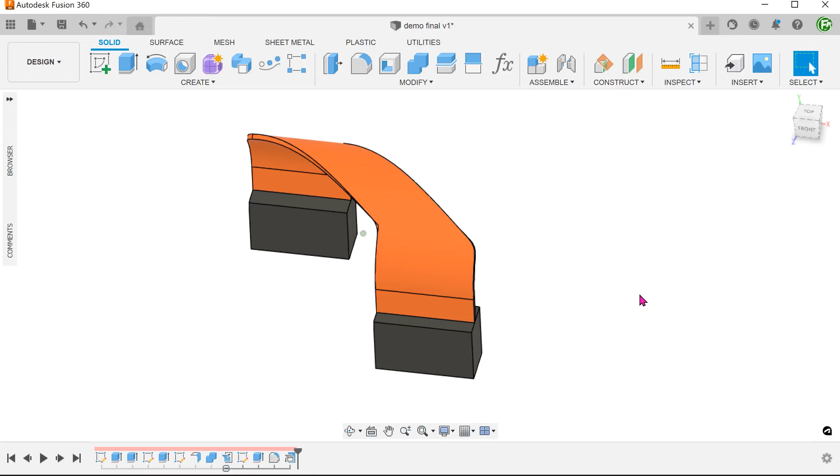In the course of my work, I often need to design flexible printed circuits. The challenge here is often to find the correct length to stretch across components, and at the end of the day, provide a flat profile for the electrical engineer to lay out the circuit. We can make use of the sheet metal functions to do this.

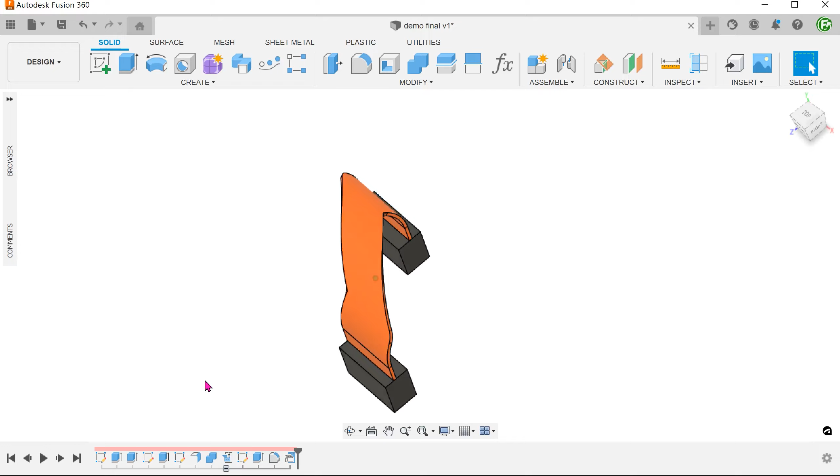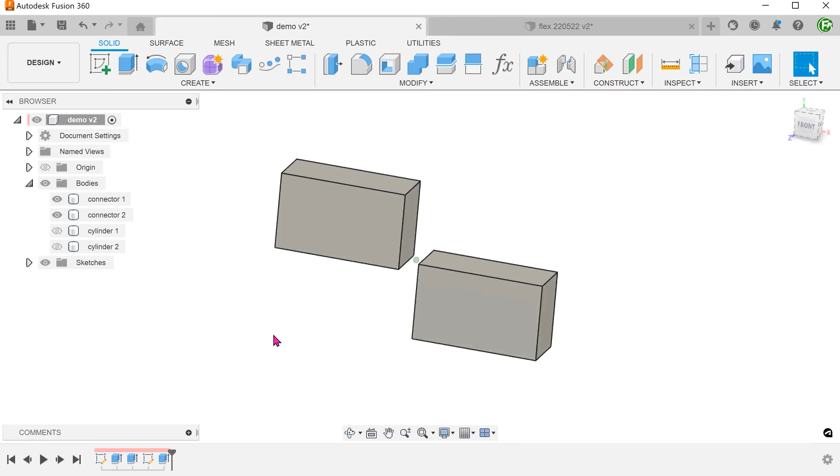The key here is to first model out the shape of the flex in its bent shape. I have two simple blocks here that represent electrical connectors. I need the flex to go from one block to the next. To add to the challenge, the blocks do not line up. I also have obstacles in the form of these two cylinders, which I need to avoid.

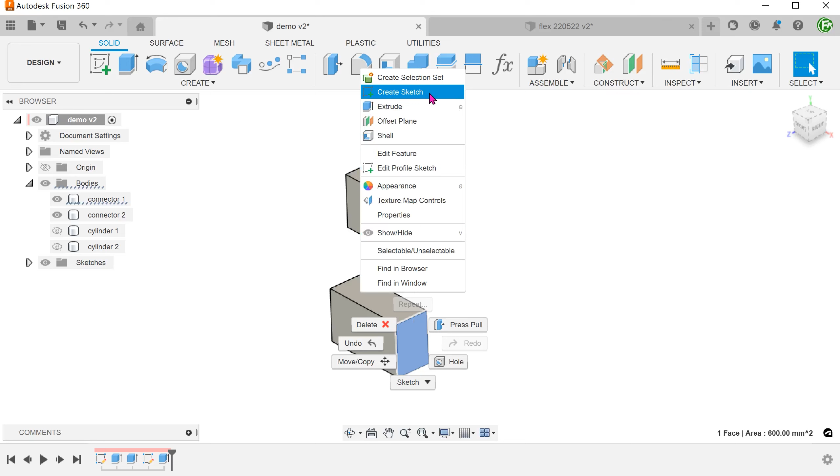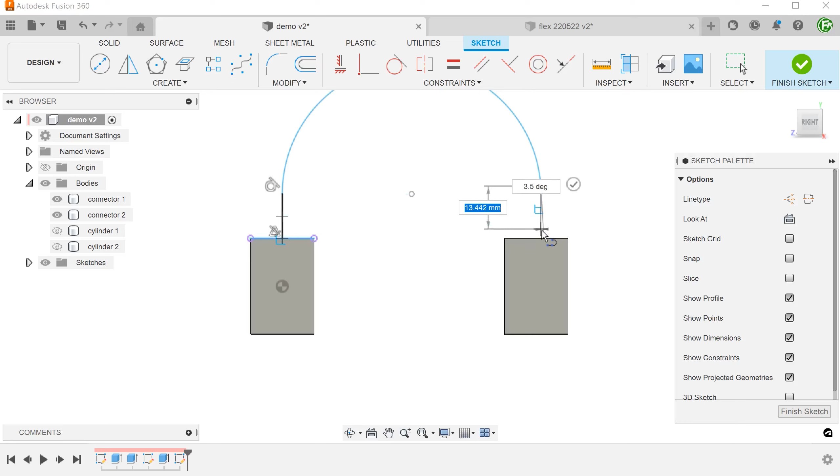Let's hide the cylinders for the moment. First, we need to draw the side profile of the flex. Begin a sketch on this face. Draw a vertical line from the center of this edge and drag out a tangent arc. Wherever possible, we want to include a straight segment, as this would facilitate the folding and unfolding process. End with another vertical line on the next block.

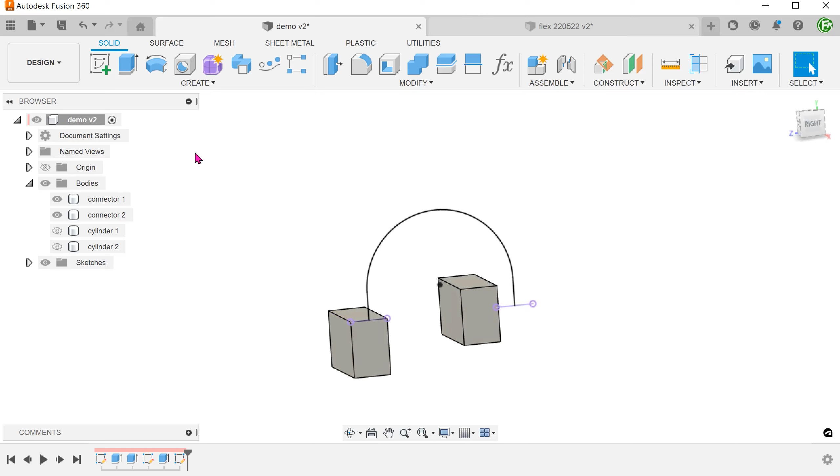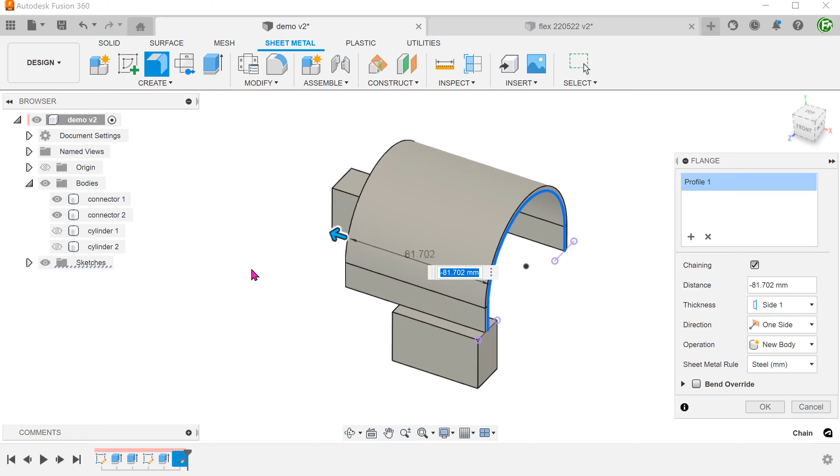Activate the Sheet Metal tab. Go to Create Flange, and extrude this chain of sketch lines into a flange. I will be using the default sheet metal thickness here. We want a flange to terminate on this face of the next block, so let's click on this face.

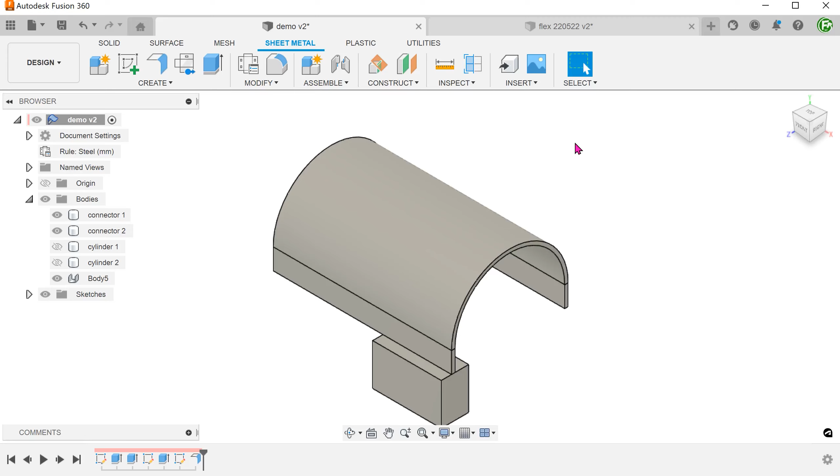Let's bring back the cylinders. The cylinders obviously interfere with the flex at this moment in time. Let's use these cylinders to cut into the flex.

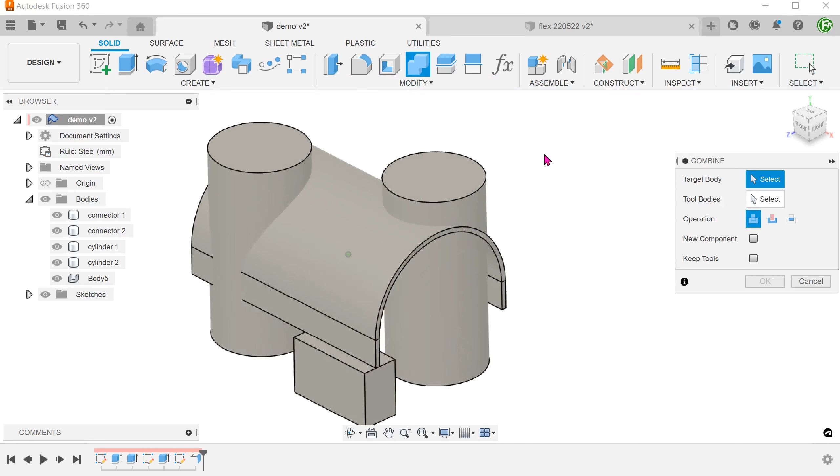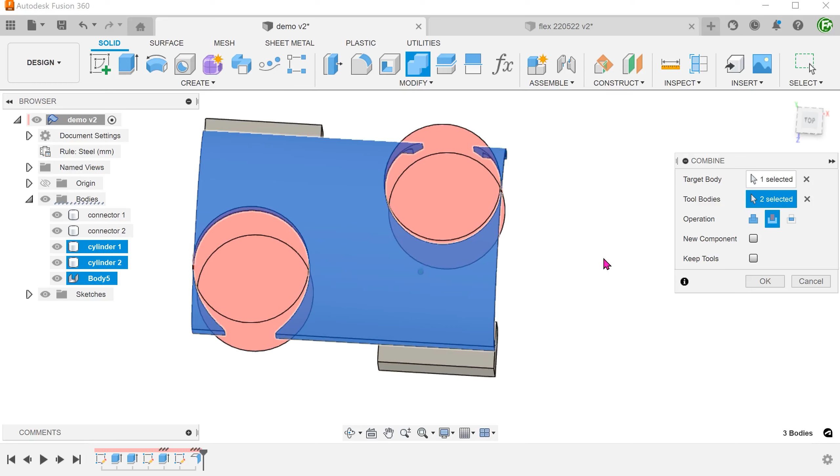Activate the Solid tab. Go to Modify, Combine. Select the flex as the target body, and select the two cylinders as the tool bodies. Set the operation to cut. We want to keep the cylinders after the operation, so check on the Keep Tools option.

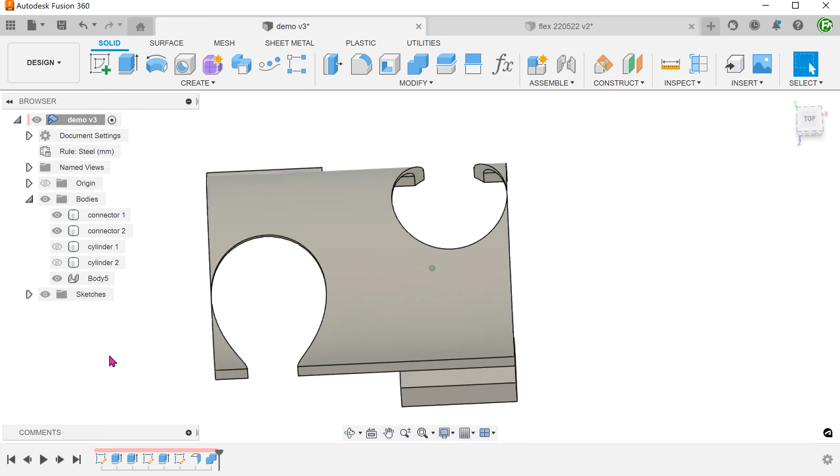If we hide the cylinders, we can see the resultant cuts. These cuts are not ideal for production. We need to make these cuts neater. This preliminary cutting operation is simply a means for us to know what is the minimum amount of material that we need to cut. To make it easier for us to sketch a more refined cut, let's unfold the flex.

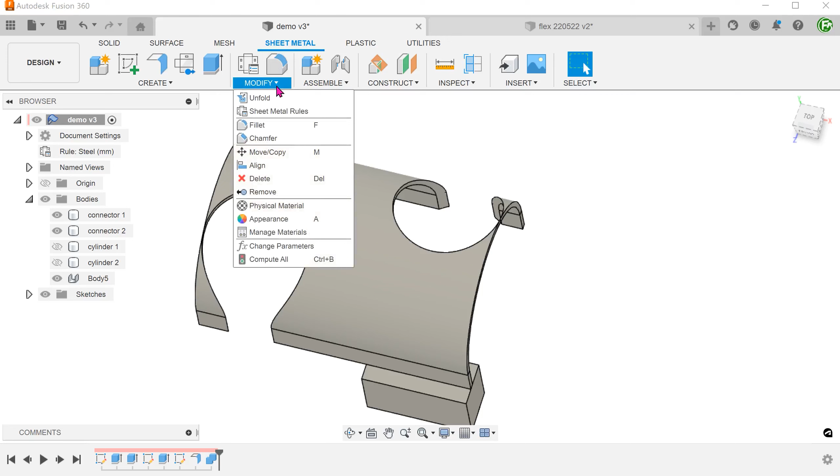Activate the Sheet Metal tab. Go to Modify, Unfold. We are prompted to select a stationary face. Set this flat face as the stationary face. This face will remain stationary while the rest of the flange unfolds. Check on the Unfold All Bends option.

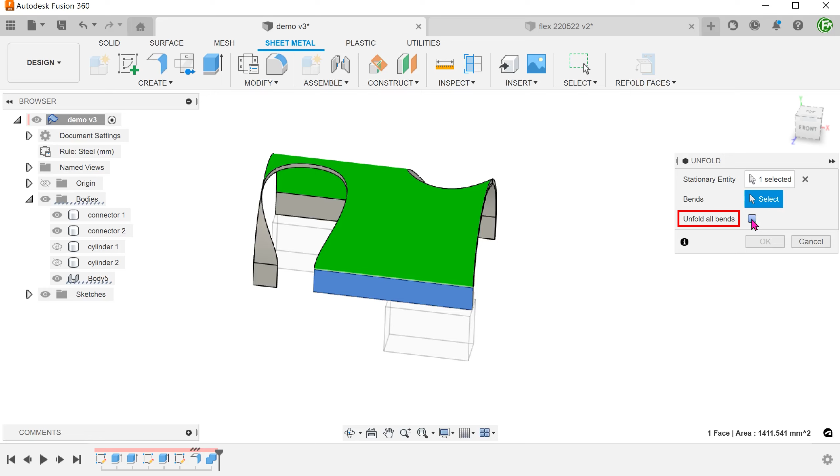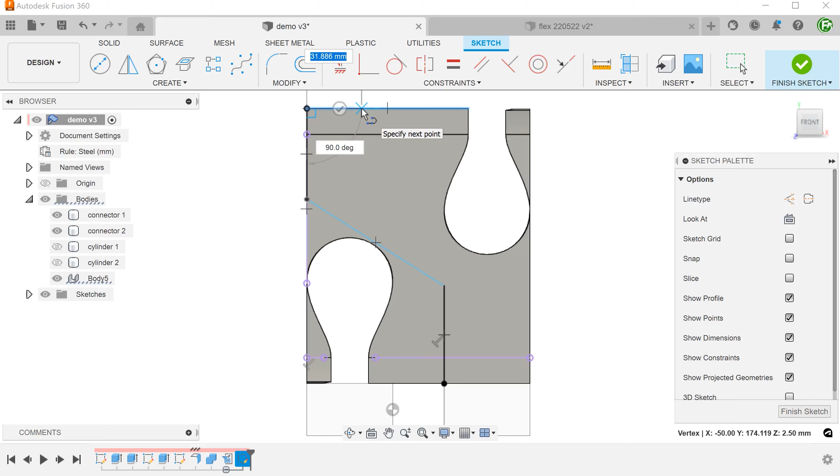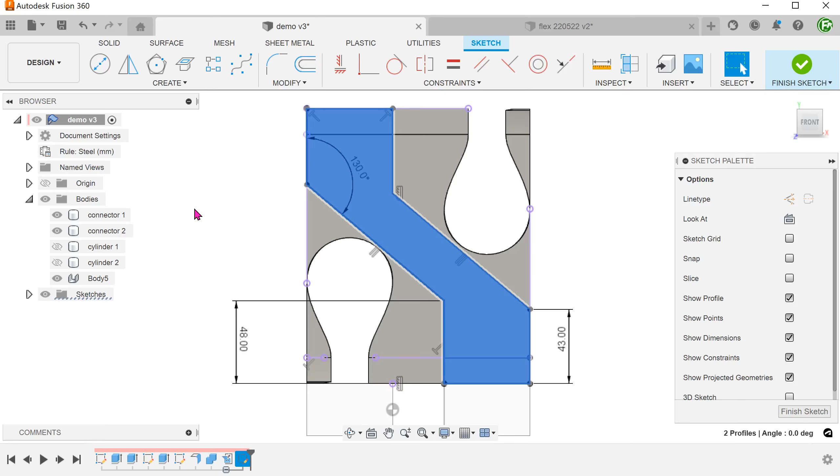With the flex unfolded, we can perform a sketch on this face to make a more refined cut. So this is the outline of the flex that we need. Use this profile to perform an extruded cut. We want to cut material on the outside of this profile. Let's set the operation to intersect.

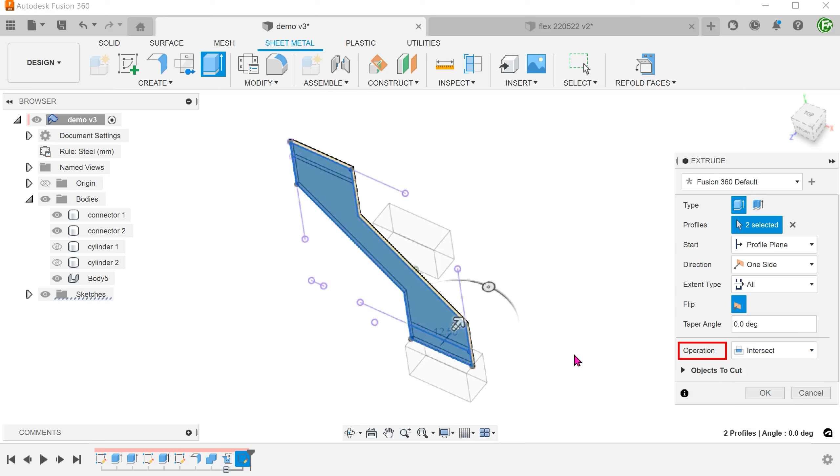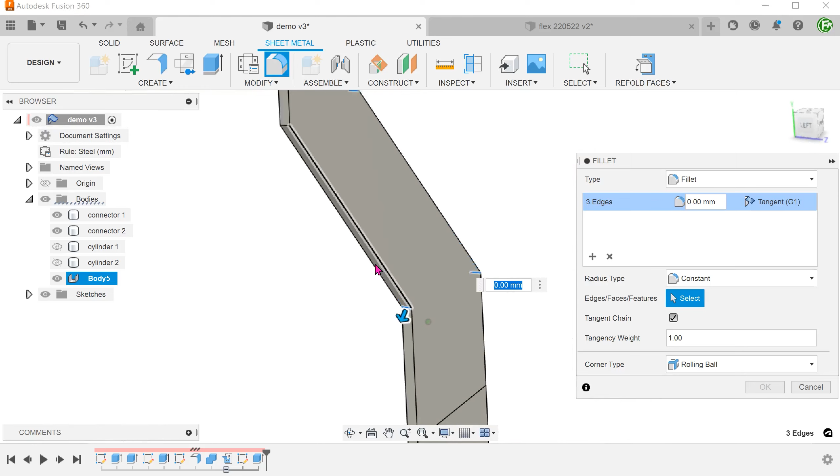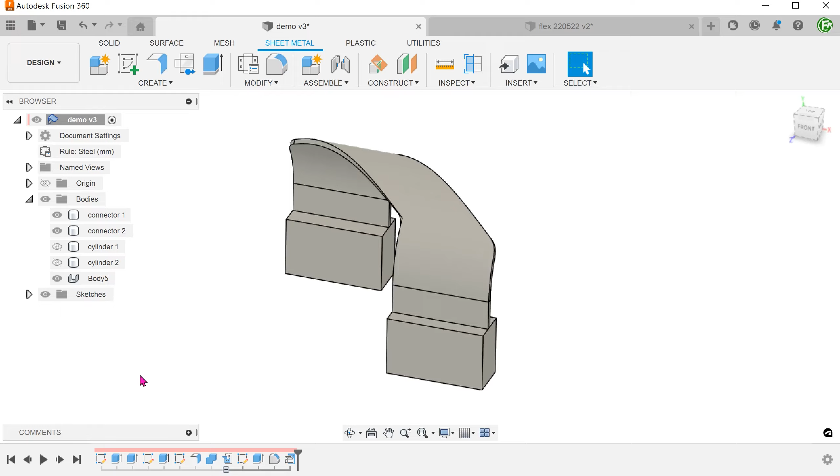While this is unfolded, we can also make use of this opportunity to add fillets. From here, we can refold and bring back the cylinders to take a look at the overall design.

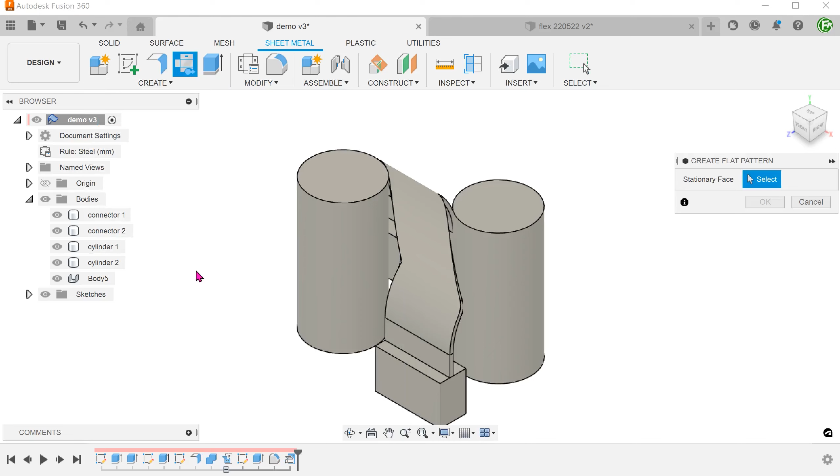Finally, we can create a flat pattern of the flex. Go to Create, Flat Pattern, and select a stationary face.